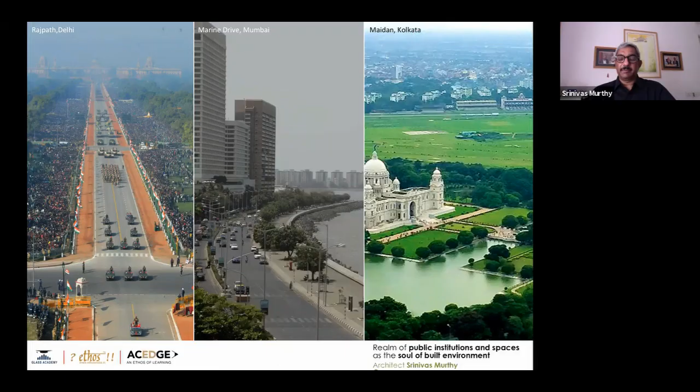So I feel my topic is very appropriate for me to talk about. I've been pretty much impressed with the kind of spaces we see in our cities. You have the Rajpath of New Delhi, the Marine Drives, and the Maidan, which are large open public spaces, streets which act as public spaces.

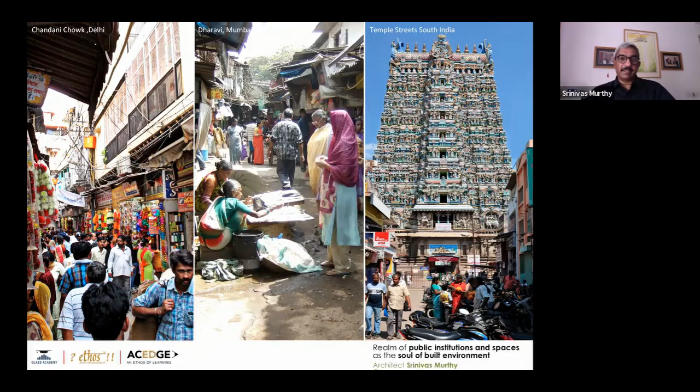At the same time, you also have things like the Chandni Chowk, or the narrow lanes of Dharavi, or the temple streets of South India. These are all nothing but spaces of different kinds which are in public domain - sometimes open spaces, sometimes commercial or business activity spaces, sometimes just recreational spaces. And then you also see in our country a huge dichotomy in the kinds of spaces we live in.

I think this is a wonderful picture. I must mention in my presentation that some of these pictures which I'm using are sourced from the net, so I hope that whosoever is the author of these pictures gets due credit. And I hope since we are using it primarily for academic purpose, it's all good.

To me, it's always a question that when we design projects, I don't believe we really design just the built form. Actually, what we should be designing is the combination of built form and open space. The open spaces, whether internal or external, actually complement the total built environment creation process. You can't say your building is beautiful if it doesn't complement the open space you've created around it.

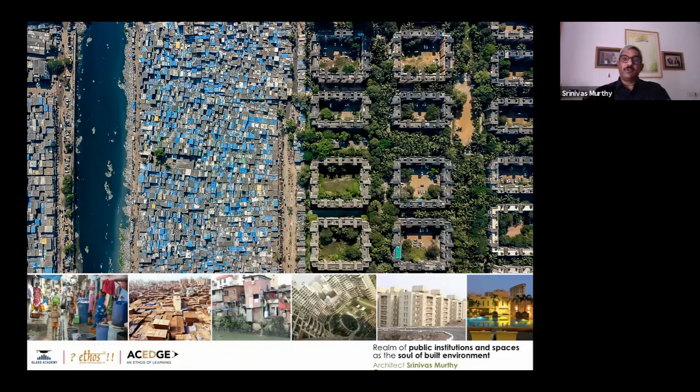Sometimes the process can be very conscious, where your focus is both open spaces and built environment. In many cases you'll find we create open spaces which are sometimes not so good and not so bad.

We have also created spaces like these, when we talk about open spaces like the Rajpath or the Maidan or some of the central vistas of New Delhi. At the same time, we are also creating spaces like this, which I don't know whether they really serve the purpose, but they are very much part of the built environment we are creating.

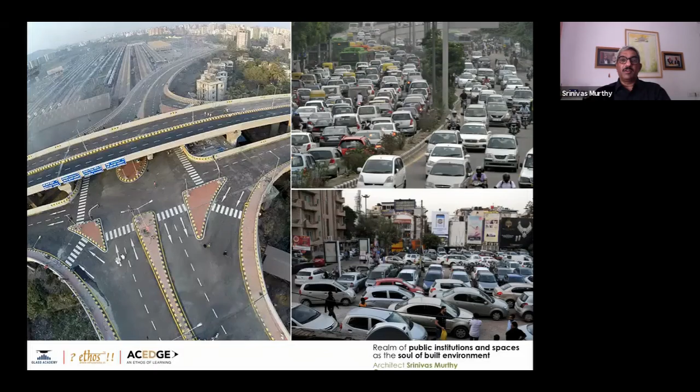Sometimes we also look at the best examples of such spaces. In India, this is generally what we tend to see all around us. I don't think we've yet reached a stage where we're conscious about the quality of space around us. Whereas abroad, you see spaces where people transform existing infrastructure, vehicular or railway tracks, into large public spaces used by people.

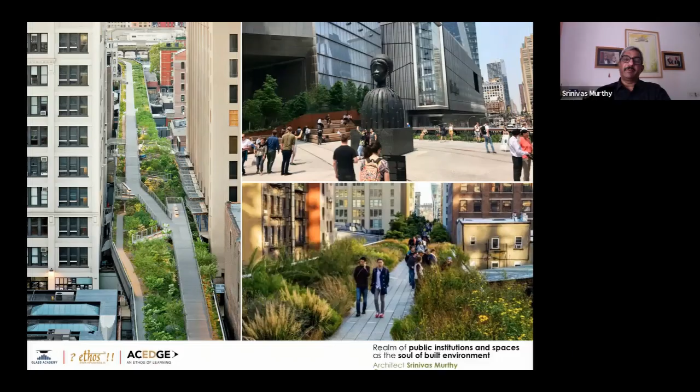This is one example, I'm sure many of you are aware - this is the High Line of New York. This is another very interesting project, the Pier 55 on Manhattan, Lower Manhattan, towards the Hudson River on the west side of the island, where one of the piers is now being converted into a public park.

This shows how such public infrastructure is now being converted into public recreational spaces. I'm sure in India we'll soon see some such initiative where we realize the potential of the spaces we have and try to bring them into the public realm.

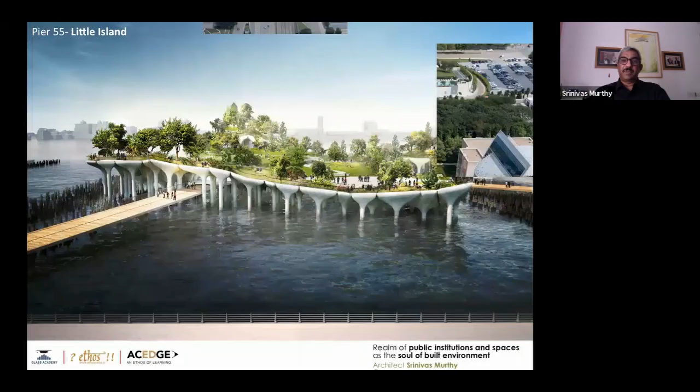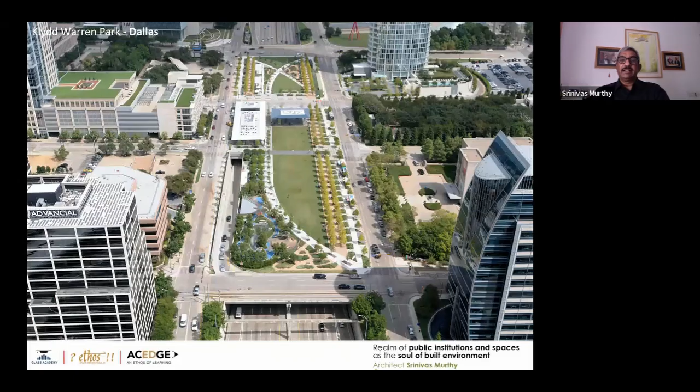I'm sure these are the kind of things India would also need very soon. I would say I got lucky sometimes - I feel the kind of projects I got to do in India gave me opportunities to address these issues, though sometimes people tell you it's something for urban designers and planners, and they give you the overall ambit of space within which you need to work.

But I feel that as a conscious architect, you could also get involved in thinking beyond just the scope of designing the four walls of your building, and try to understand where your building actually lies - what is the context of that space you're working on. That could give you good clues on how to design your own building, what kind of architecture you should be creating.

So these are the kind of images I've shown you till now. The slides I've shown reflect the kind of thinking I'm involved with - architecture, public spaces, green spaces, urban spaces, which are all an integral process in the whole thing.

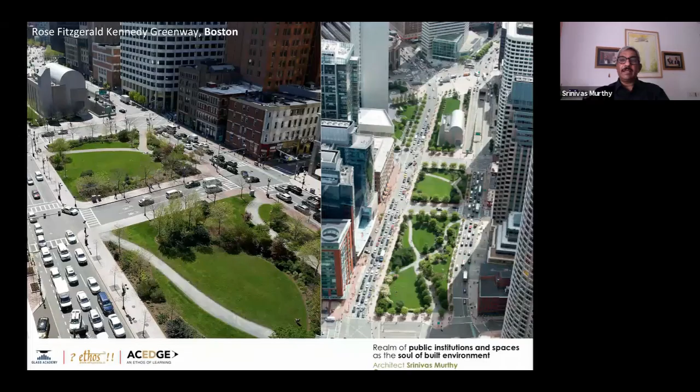It's not that you need to look at them in isolation. So with this, I think what we are going to do is talk about five of my projects, which would give you some glimpses of my thinking about spaces. Most of them would be public spaces, and I'm sure we will be able to bring out certain issues.

The first one being the Indira Gandhi Memorial Museum. This was my first project. Soon after my graduation, I had the opportunity to work on this project along with the principal architect Ramesh Rai, who is a Delhi-based architect, and Madhu Pandit and Sophie Gaur, who were the other two designers on this team.

Now, coming to think of it, if you were to look at the brief saying you have to design a museum on an important personality of the nation, where does public space come into the picture? We were very young and were really inspired by Ramesh's thinking about how to deal with a museum, that too in a small bungalow. The contrasting part being that it was a museum on one of the most popular personalities of our country. So how do you deal with it?

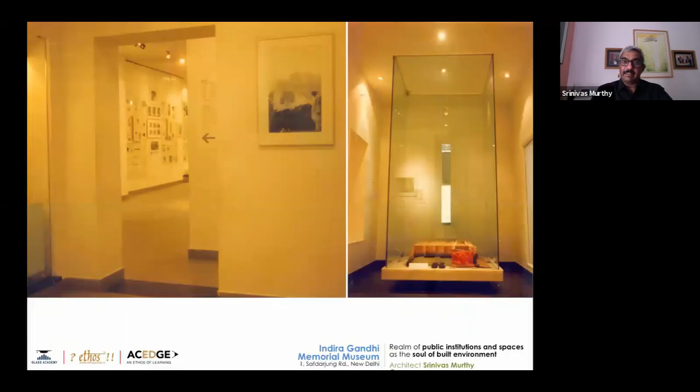Then we end this part of the museum with a glass cube displaying the sari she wore on the day of her death. We're trying to say this is like the interval of your museum visit, where you have seen her death due to political circumstances, gone through her political journey, and witnessed the sari, bag, and shoes she was wearing on the day of her killing. This brings a close to one chapter of her life.

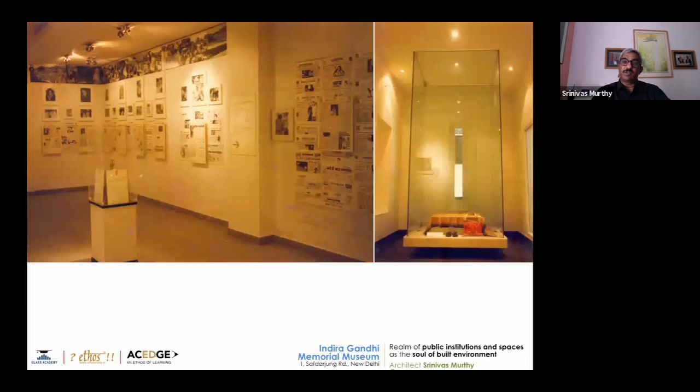Then she is born again as the granddaughter of Motilal Nehru and daughter of Jawaharlal Nehru. Her personal journey starts, displaying her personal artifacts, her books, including the suitcase she traveled with to Europe.

We also show the international section where she travels all over the world, and conclude the exhibition with that part. So we didn't follow a very typical route from birth to death, but reinvented the path to create interest. This is one way of dealing with a very complex subject when designing a museum for a person, especially in a public domain where thousands of people visit.

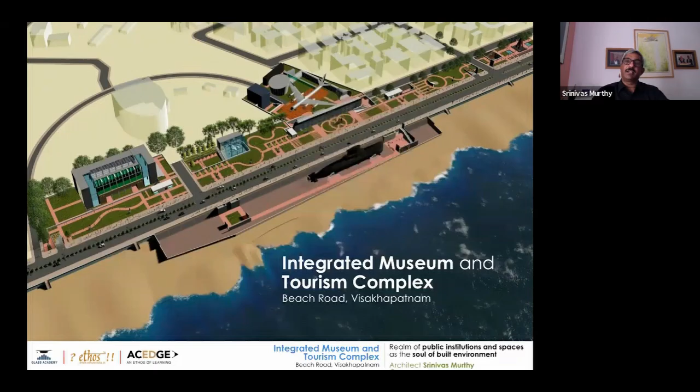The next one is a very interesting project in the city of Visakhapatnam on the east coast of India, where this is how the beach road looks. Probably the only submarine on a beach in this city has now been converted into a museum. We were called in through a public competition to design a Sea Harrier museum, donated by the Indian Navy after the successful completion of the submarine museum and Tu-142 aircraft museum.

They also wanted to set up a dedicated museum for the submarine, and under the Smart City project, a multi-level car parking. So the brief was to set up three buildings on the beach road serving as the Sea Harrier Museum, the Submarine Museum, and the multi-level car parking. Sometimes this seems a fairly simple brief—just design three buildings in the place the client identified. Here the client is the Visakhapatnam Metropolitan Regional Development Authority.

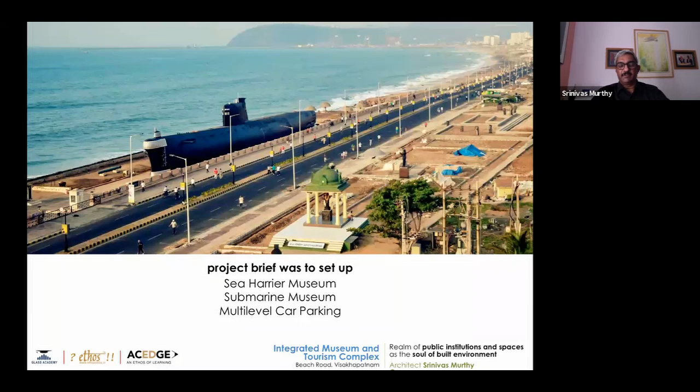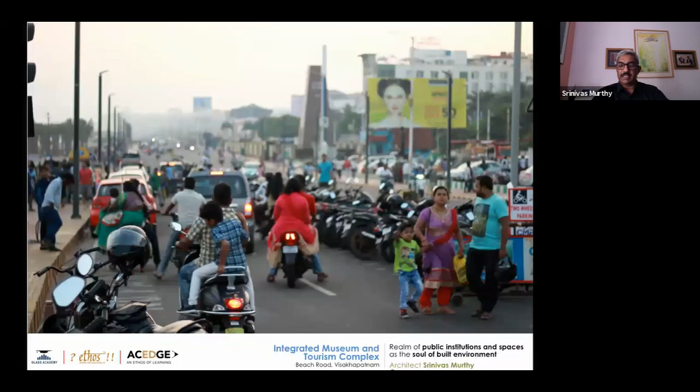We studied the whole site and tried to understand how this beach road behaves. This is a picture of the beach road—it's a very busy, crowded street, as you can see. There's a huge requirement for parking, which is why, under the Smart City program, the need for multi-level car parking was identified. You also have scenarios like this where people sit.

There are a lot of local vendors who come in. They sell—it is for them, it is their livelihood. They survive on this economic activity. And yet there are challenges where you don't find it very convenient for some people to enjoy the whole trip.

Because it is so crowded and it lacks some of these basic facilities. Specifically, if you have to cross the street, since it is crowded, you can see what we were trying to show: within a fraction of a second, you had to be careful enough to avoid any kind of collision with a vehicle passing by.

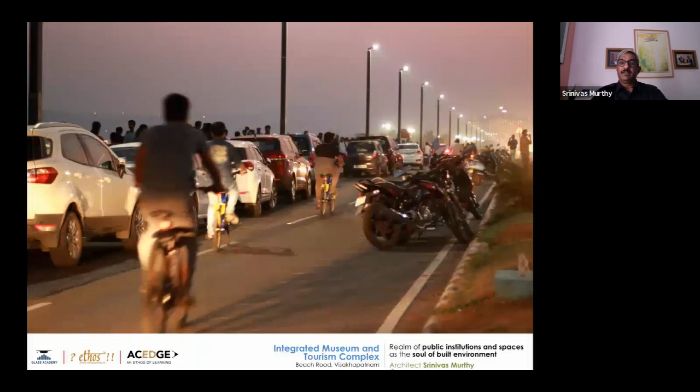Naturally, parking was inadequate, but at the same time what we felt was that the whole beach road is already a very popular and heavily used space. And then on top of that, we are going to add a few more buildings to it.

So as an architect, specifically after having experienced all the kinds of projects which I showed you in the earlier part of the presentation, where we were trying to see how to recreate green recreational spaces without having to build more, we thought: do we really have to build new buildings?

That is one. Second, what you were also going to do is add built mass onto an already heavily dense built environment on the beach road. So we said, can we avoid doing that?

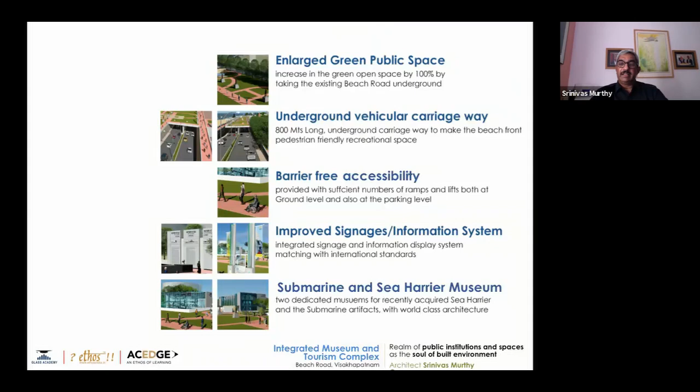So that is what we thought—that we should first focus on how to enlarge the green public space that we have. Some of these constraints which we were looking at are listed here. We said to the client, can we do it this way, that we try not to build? Sometimes I feel that if you build less, you can actually create more.

With that concept, we said why don't we look at parking which can go underground—which was not really thought of, because people have the perception that underground parkings are generally dark and dingy, and especially if run by government organizations, they may not be the right kind of spaces. Will they be maintained well or not well? So that was a challenge we had to worry about.

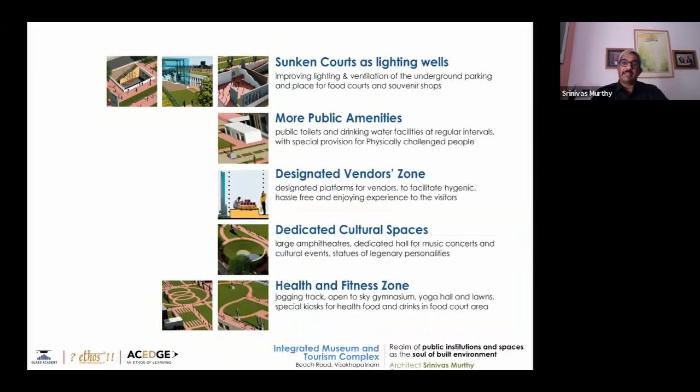Second, how do you look at the two museums that had to come up? So we went ahead and tried to analyze the whole site.

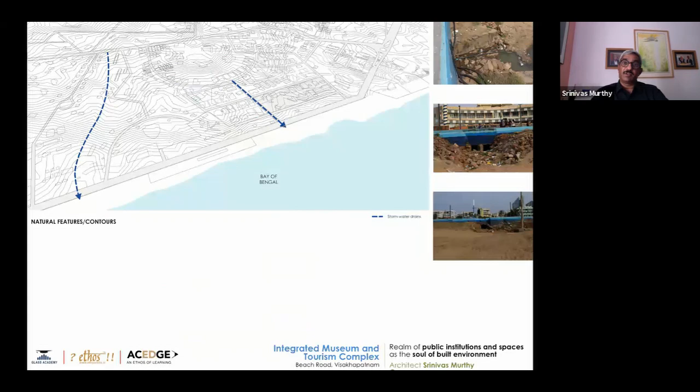Naturally, the whole site was sloping towards the seaside, and we realized that the level difference between the high tide level of water and our site was almost 10 meters. So that is a very interesting thing for us to look at as a designer.

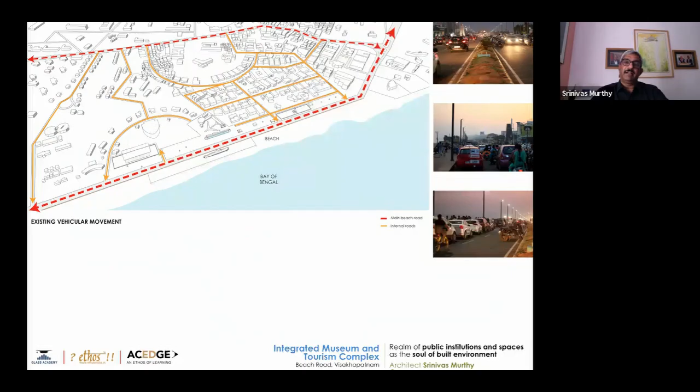Then we also studied the circulation pattern around that and saw how we could mitigate it. You can see that the red arrow is trying to show that it's a heavily used beach road, and creating more facilities at the surface level could lead to certain problems. This is how we analyzed the existing spaces of interest and what is happening.

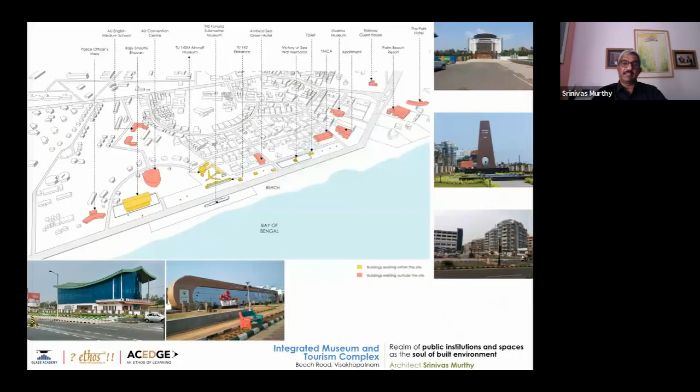This is a typical example of the important buildings where a lot of people visit. On your left bottom there is that glass building, an existing building within the site, adjoining the site, which we were taking out. We identified this as the area for the whole beachfront where the museums were supposed to be set up.

Two things which we proposed to the client: one, we said can we use the existing building and refurbish it to accommodate one of the museums. That way you are avoiding building one complete new building to begin with.

Second, if you can see somewhere in the middle here where the cursor is, these are the existing buildings housing the Tu-142 aircraft museum. We said why don't we simply expand it a little bit as much as required for the submarine museum, so that we again don't build a new building for the second museum.

And the third thing, as I mentioned earlier, is that we wanted to take the whole parking underground, almost under the area which you are seeing as green on your screen, by which we would avoid building the third building above the ground.

Also, when you talk about multi-level car parking, if you have to think about accommodating on average about 1,000 cars, you are actually talking about 3 to 4 floors. So that was a challenge.

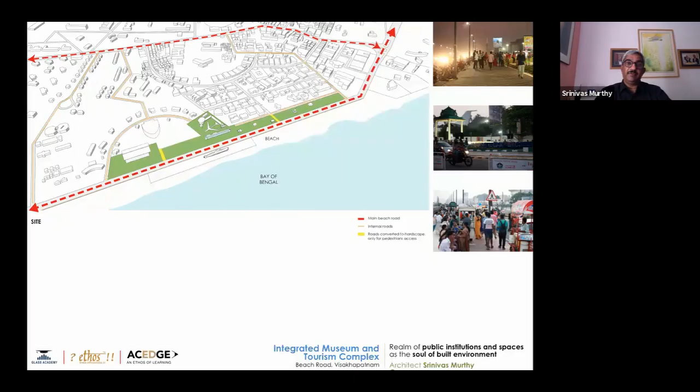So keeping all this in mind, we went ahead and designed the first project. Here is a conceptual view of that project where we said this beach road remains as it is, but you create this kind of a landscape plaza for public, adding two small bits of buildings as an extension of the existing built environment. This was the stage when we were talking to the client about convincing them using an existing building on the extreme left of the slide.

Luckily, they agreed, but they were really worried about how we look at the underground parking. We suggested why don't we look at parking with courtyards at regular intervals, so that these courtyards, which are at sunken level, would provide natural light and ventilation to the basement parking, and at the same time provide opportunity to create more public infrastructure at that level. So that way we were able to solve the problem of natural light and ventilation, making the parking area an active space rather than just a parking space.

Now, what I'm trying to tell you here is that sometimes you need to probably think beyond just designing those four walls, as I had mentioned. Think about the larger issues associated with it and try to develop a brief of yourself, which you can talk to your client about and convince them that this serves a larger public interest rather than focusing specifically on creating two or three buildings housing particular functional requirements.

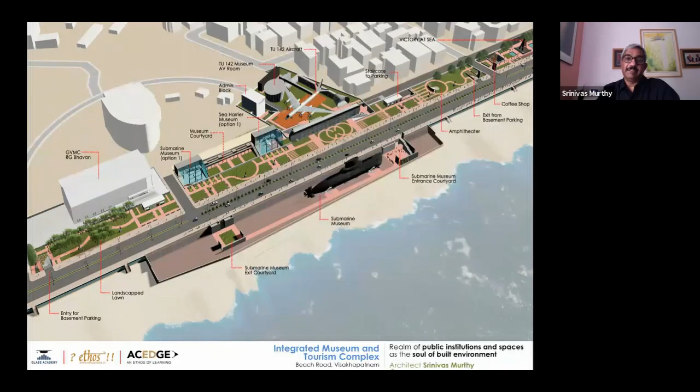I would say that we got lucky that the client agreed to implement some of the ideas. They thought it was a fairly good idea not to build over the ground, and when we could convince them to use the existing building, we moved on to this proposal where the white building on the left is that existing building, which was not much in use and which we converted and restructured into a proper museum.

At this stage, we were also talking to them about how to create more and more public space for the people, because as I mentioned, there are a lot of people coming specifically on weekends. It was a very crowded place. And then we were still not able to address the challenge of the traffic and the accidents, and it not being a pedestrian friendly zone yet.

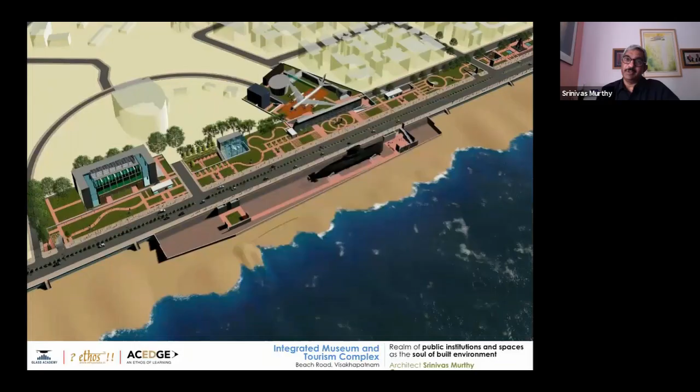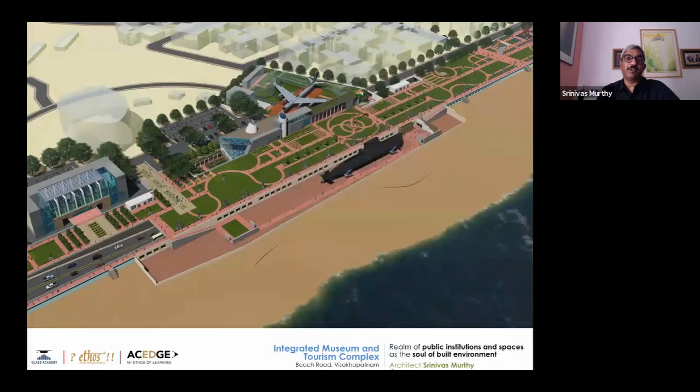And we then said, since we have agreed to take the parking down, can we take the beach road underground? That was something people had not thought of, and we had a tough time convincing the government. We could finally succeed. What we did was take the beach road underground for about 1 kilometer, taking advantage of the fact that we had a level difference of 10 meters available to us.

Right now, the beach road is almost about 4 meters above the high tide level, whereas the buildings are at 10 meters plinth level from the high tide line. So the level difference between the plinth of the building and the road is what we wanted to take advantage of. By doing a little manipulation in terms of the levels available to us, converting them to our advantage, we tried to create a public plaza which would be completely free of any vehicular movement. I think it became a very strong point to sell to the client, saying this is what we could create for the public, which they would enjoy.

So this is a proposal which we had submitted and they agreed. We are very happy that this is going to get implemented now. The project has already started. But as it happens in all public projects, it has to go through public opinion. So this is where another role of us as an architect comes into picture. Is it good enough for you to have a great idea and be able to convince your client? So between the two of you, is that good enough to implement the project?

No. When it is public space and also when it is funded by public money, people need to be taken into confidence. So we had to go through a very interesting public presentation where thousands of people came into an auditorium. We had to present and we had to listen to their observations. Sometimes they were good and sometimes they were very nasty. I mean, you had people objecting to such a project.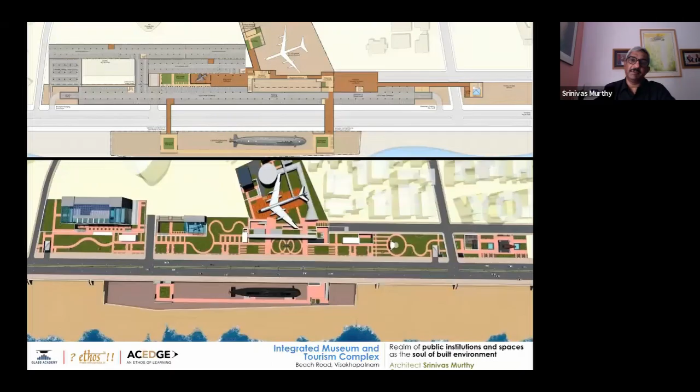This is an existing building being converted, so we have not removed any structural element, we are keeping them as is. We are removing the existing facade skin and restructuring it to look like this in order to match.

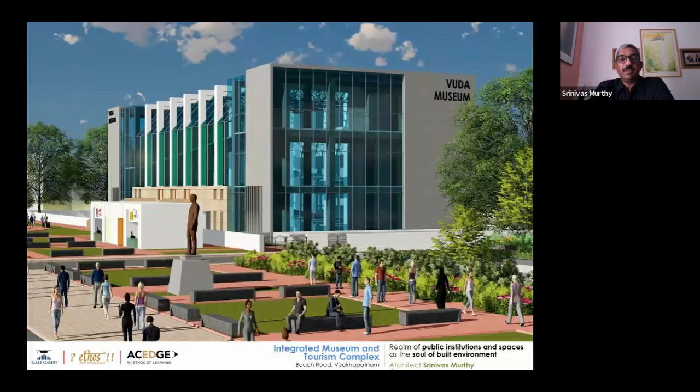Coming to the architecture and the space around, we made sure the museum building is not just something you walk in and walk out of. The whole idea is to create space around it as a very interactive zone where people would hang around for at least 3 to 4 hours. The quality of space really needs to be addressed, and this space around will add value even to the architecture of the museum building.

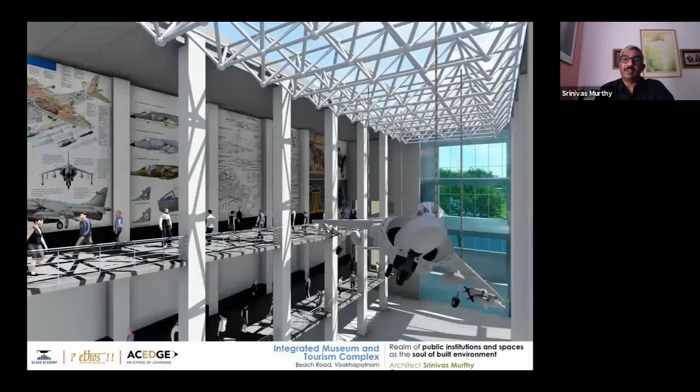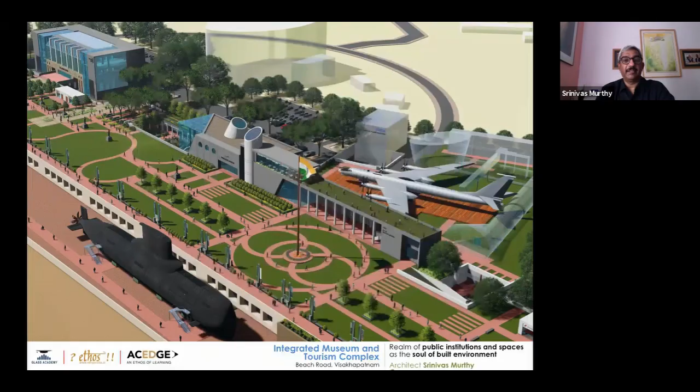This is what the museum looks like from inside, which is again a public building. The idea is that even though you are inside, you remain connected to what's happening outside through the large glass facade overlooking the beach road. This is the whole plaza created once the beach road goes underground, completely pedestrian friendly. This is the submarine museum proposal.

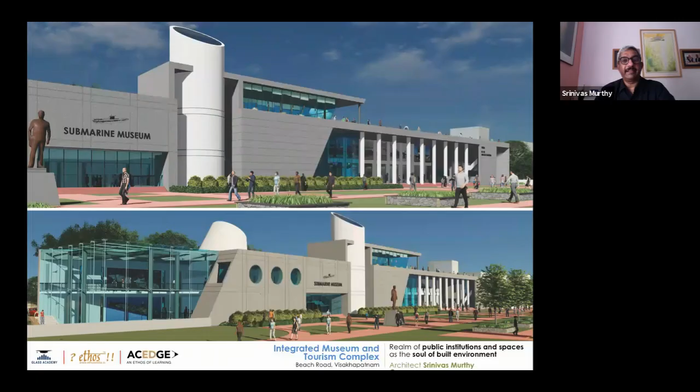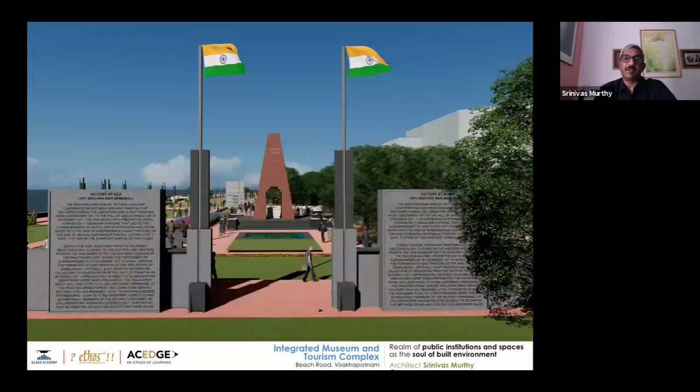In this image, the right side of the building is what already exists. We are simply adding a little volume onto the left, avoiding creating a new building on the beach. That beach also has a monument to India's victory in 1971 over Pakistan.

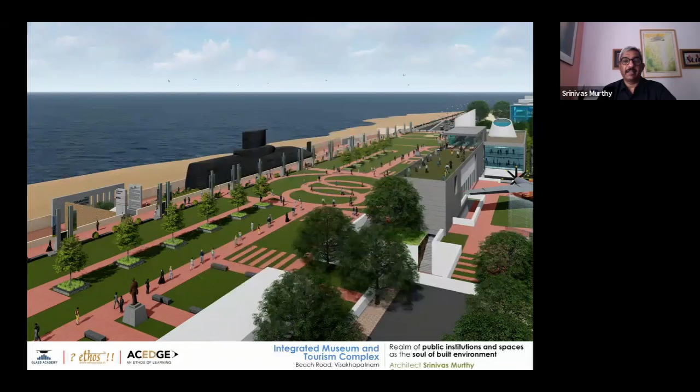As part of our extended scope of work, since it is now a completely pedestrian friendly zone, we decided to redesign the whole landscape of that area. This is a view again from the plaza. As we mentioned, during our study we found there is a lot of economic activity happening along the street by the poor people.

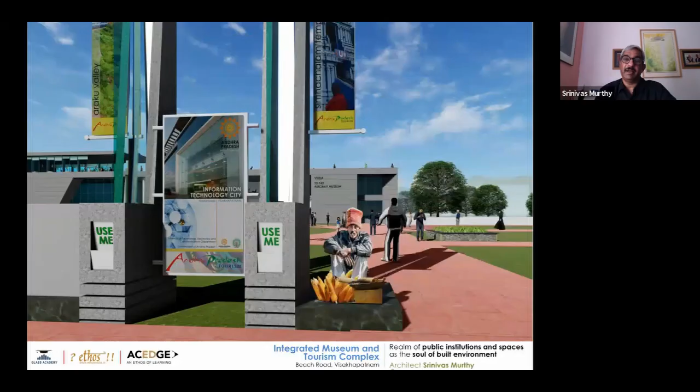So we thought of providing facilities to them in a very designated manner, including signages, which could be used by government and other organizations to promote various activities.

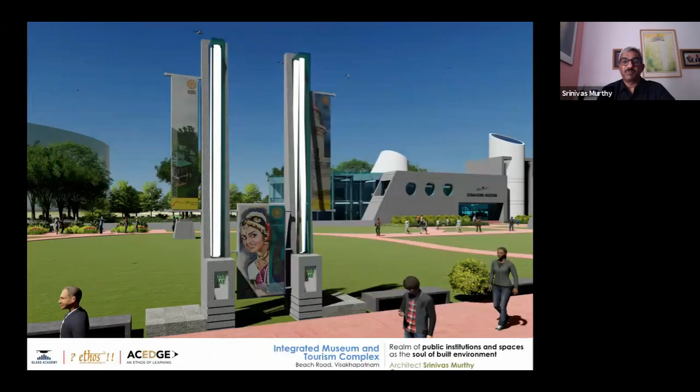Those platforms you can see are the vendor platforms. Briefly, I'd like to sum it up by saying this is a project which could have been just 3 buildings, but we took this opportunity to convert it into a major public infrastructure project, thus creating an interesting public space. The museum building work has already started, and we're looking forward to creation of this public plaza very soon. If this happens, this would be the first of its kind in India where you're able to divert a public infrastructure like a public road, give priority to people and their spaces, take vehicular traffic away, and create a public space.

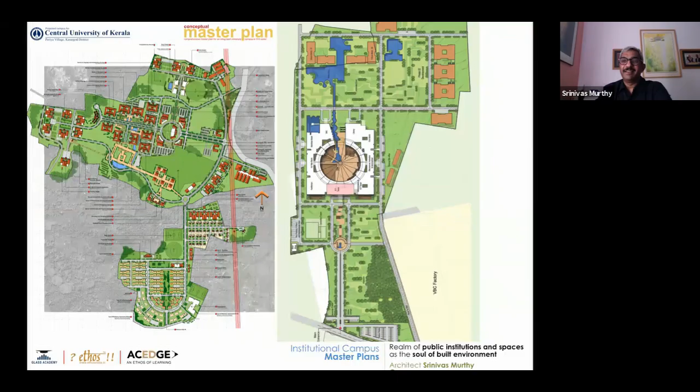Now coming quickly to a couple of other public projects, master plans for universities. This is a large public university we've done in Hyderabad. This is already built. So this is how it looks.

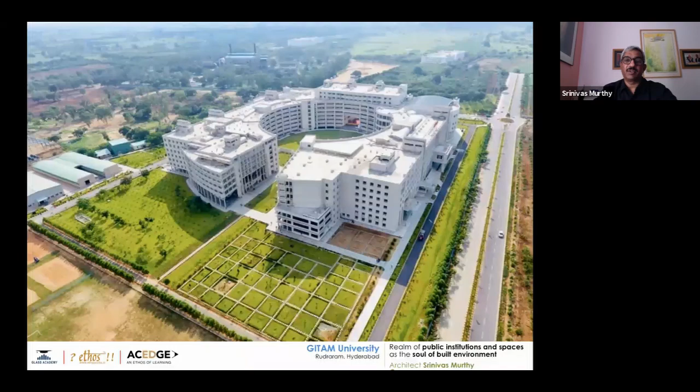Again here the focus was on how do you integrate the open space and the built environment together to create interesting public built form. Another very interesting thing with public and institutional buildings is that you need to create a certain kind of imagery which stays back once you're out of that space. I'd say a certain amount of monumentality has to come into that, and we attempted in this project to achieve that with some very interesting spaces, because this is a university space for young people. So you need to create spaces that are interactive in nature, giving a lot of flexibility and choices for students to go around and use.

So this is an engineering college university, located in Hyderabad. As you can see, the kind of spaces we've created are used in many different ways, and also the kind of imagery we tried to achieve is seen in these pictures.

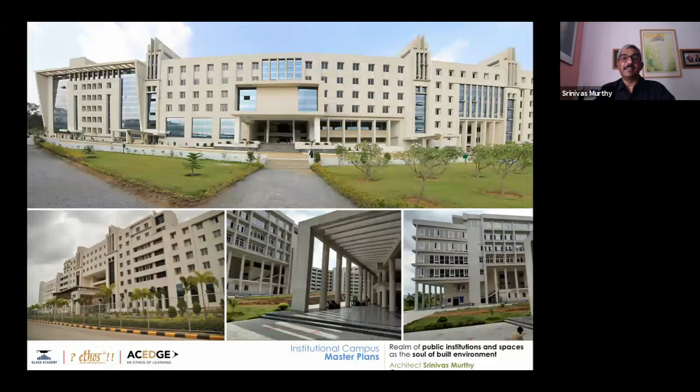The third very interesting project is also on the east coast, in the same city, Visakhapatnam, on a hilltop, where the master plan was done by us. There was an old banyan tree and an old dilapidated structure when we were called in to design a public plaza there. Since a lot of people were coming onto this hilltop overlooking the sea, and it had become a very popular destination, we needed to provide food courts. That was the brief of the project, along with a place of exhibition. Typically people thought of having a handicrafts mela or something once every 2 or 3 months. That was the brief given to us.

And what we said was, why don't we look at what already exists there? Since it was a hilltop, there were a lot of stones available, and the banyan tree became our center point. The dilapidated structure was recreated like a traditional Andhra house of that region, which could accommodate the art gallery and exhibition space. So here again, the attempt was not to add too much built mass into a public area, but with a minimal approach, create an interesting space for people to hang around and use. I think this was the attempt we made about 15 years ago.

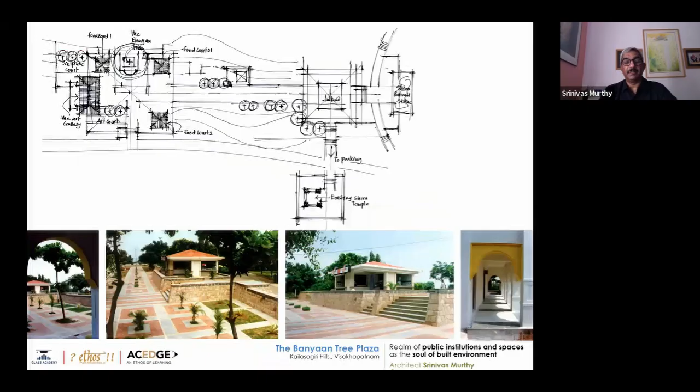I think this was another very interesting example, in our opinion, where we were able to use two elements as anchors, the banyan tree and the old dilapidated house, as the anchor of the project, and created this public space, which has now become very popular with people. So these are a few images of that.

Now we come to another very interesting project, which is our latest commission, the Natural History Park and Museum, again in the same city of Visakhapatnam.

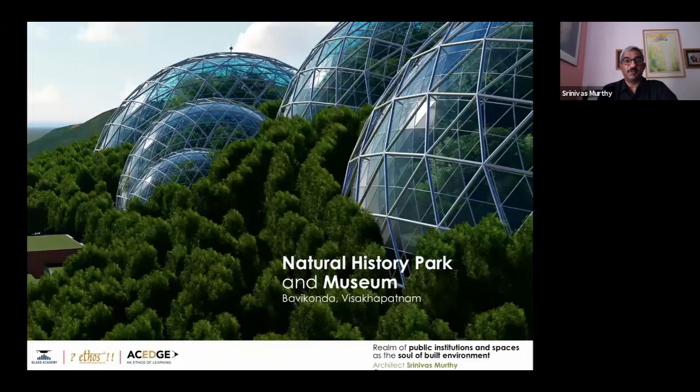Here again, the brief was very simple: we had to create a museum of natural history. This is the master plan, which we are able to share with you right now, covering about 100 acres of land.

Before I explain the project, as an architect, the client had probably thought we would design buildings as per their technical requirement. But we argued that we should look at the whole thing in an integrated manner and bring the landscape architect onto the board even at the stage of designing these buildings. So that was number one.

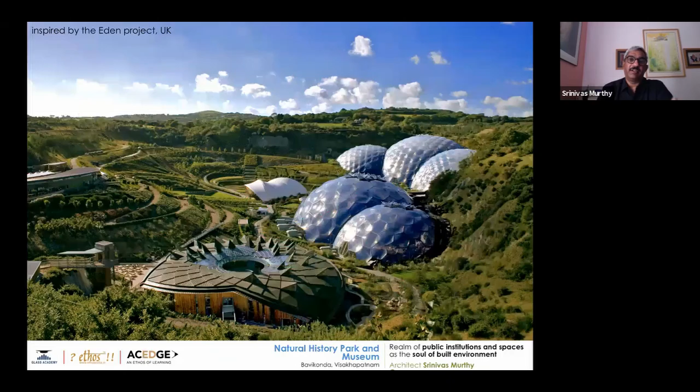That meant many rounds of discussion with the client to tell them that this project is not just about buildings, but about creating open space, and that too in a very specific manner, because here you're talking about natural history, plants, rocks, and a certain kind of imagery that would tell you about prehistoric times. So this project is not just about buildings, and we had to be very conscious about it.

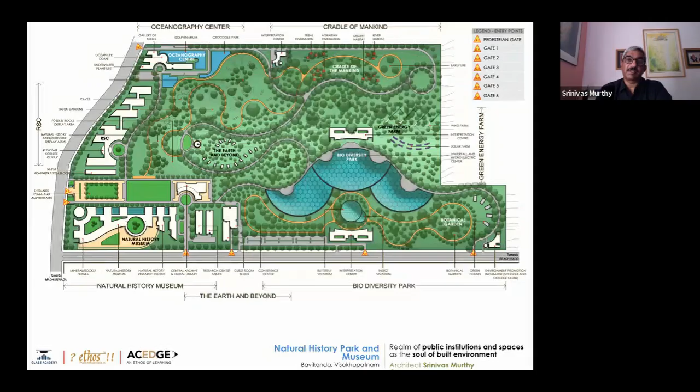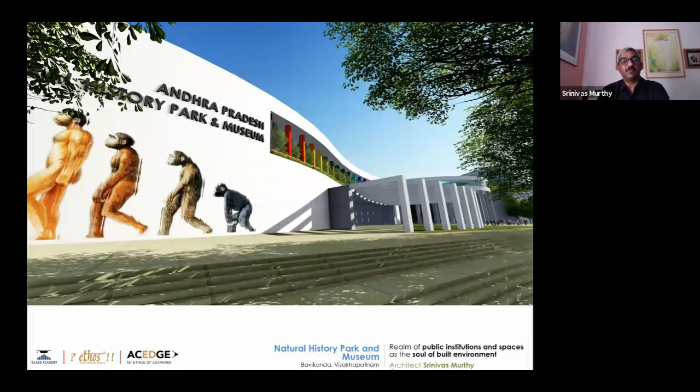So we started working with them, and I would say we were pretty lucky that the client allowed us to experiment with this kind of space. We ended up suggesting similar-looking structures that integrate the overall master plan, and the buildings themselves will become landmarks for people to go around. Even if you are driving past them, we are hoping these will become iconic structures that people will look at as an interactive place for knowledge and recreation.

It's not just about school and college students being taken on an excursion, but it also becomes a place for families to come and spend the whole day, and in the process learn a lot about the natural history of our planet.

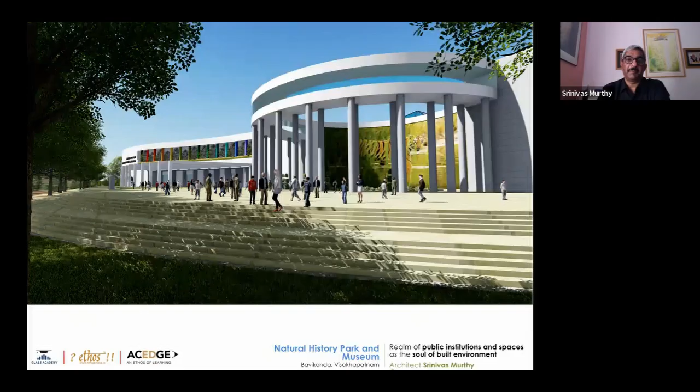So these are some of the imageries I'm showing you here, where these kind of biosphere domes would probably be the first time India is building something like this. This project has now started implementation, and we have begun building the first building—not the domes yet, but very soon these will be built.

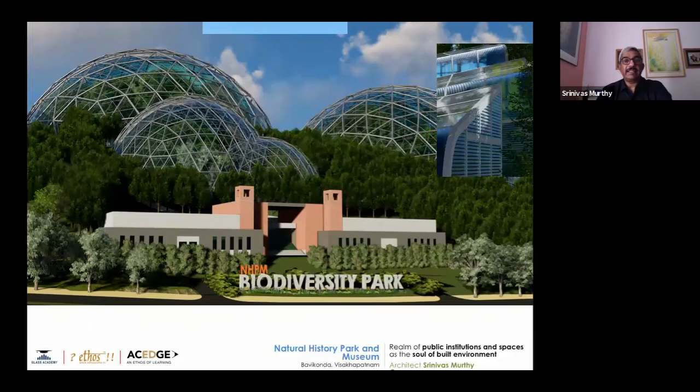Now, interestingly, this is the type of space you very rarely get to design. You have to understand what it means to design a biosphere, what kind of spaces you'll have to conceive, which in my opinion is quite different from designing spaces inside a building.

Here, obviously, a lot of scientists who had worked in this field were my collaborators in understanding. When you're creating spaces, they would say, 'No, here is what we need—a 30 foot high rock,' and we will create that. It needs to have certain kinds of flora and fauna. So probably this kind of space may not work, and finally you have to increase either the height of the space or the dome.

At the same time, how do you make it feel like a natural environment, not an artificial one? That's how we concluded that we need to look at architecture not just as a building, but also as part of designing an outdoor space, using an element that gives a sense of enclosure without being too heavy. So we recommended this glass dome, inspired, as I said, by the Eden Project.

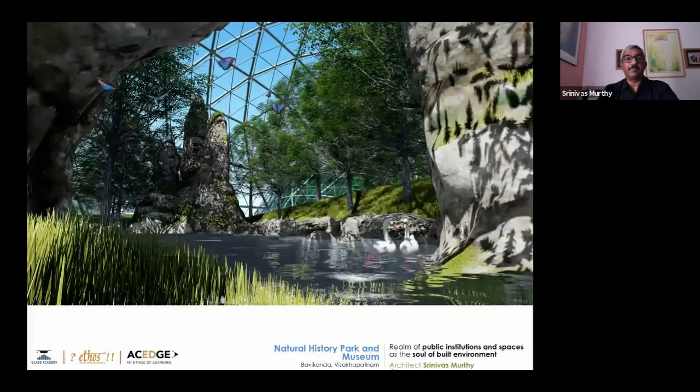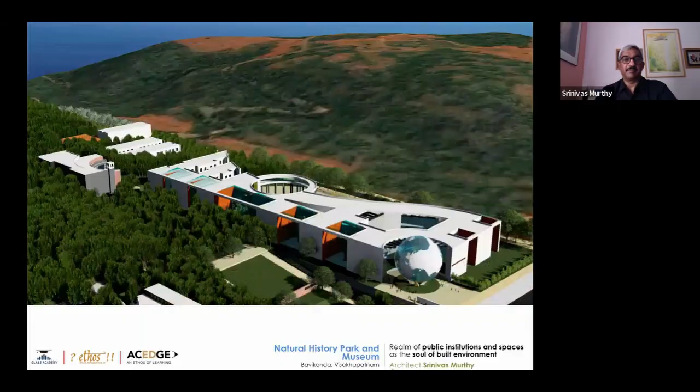So this is the kind of space which was designed. This is a 5-year project which we have taken upon ourselves, and I'm sure it will also be an interesting project that we are looking forward to.

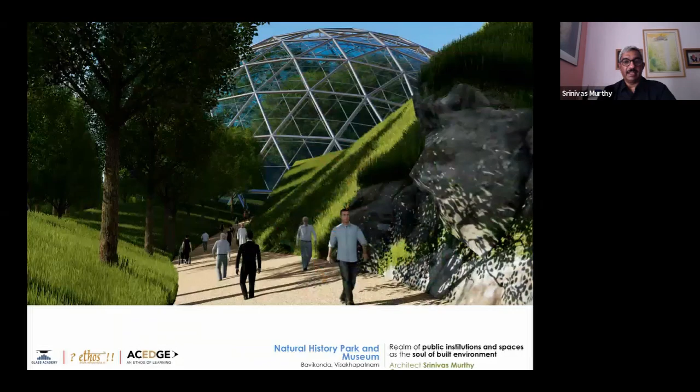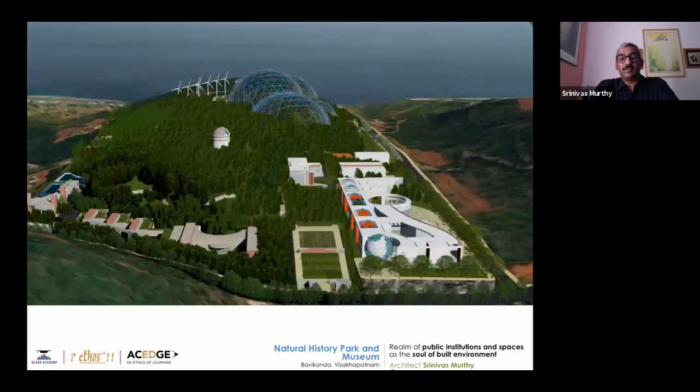So with this, I have shared some of the projects we are designing now, and some that have already been implemented. I'm looking forward to some questions. I hope I've been able to throw some light on how to look at public buildings and public spaces, and how a simple brief can be turned around to serve a larger cause of public good. Thank you.